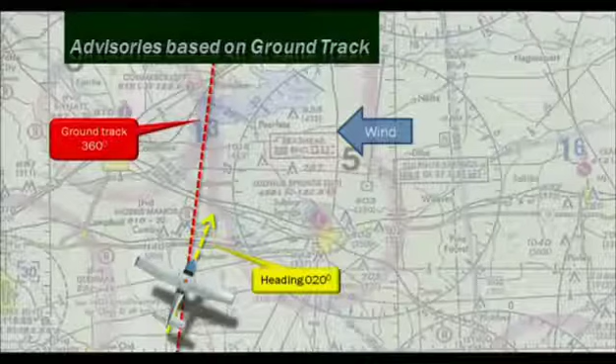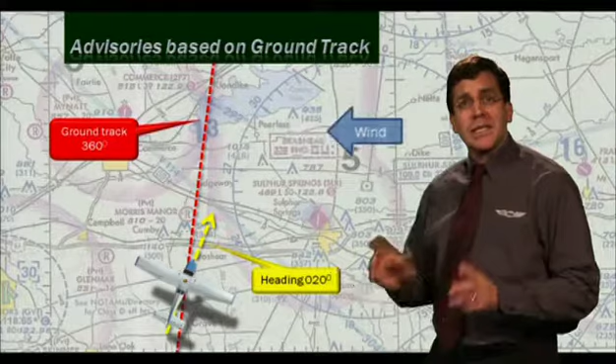Now, these advisories are based on your track over the ground and not on your actual heading. Let's take a closer look at how this works. Here is a 360-degree ground track, and the wind is coming from the right. We're flying a heading of 020 degrees, yet the aircraft is tracking over the ground, showing a 360-degree ground track. The traffic advisory ATC provides is based on the ground track, not on the heading you're flying.

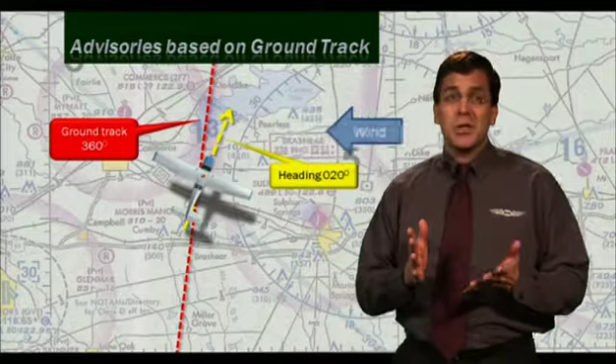This is important so you can look for the traffic in the correct quadrant. When ATC provides traffic information, they're giving it in terms of the face of a clock. As you sit in the cockpit, imagine a clock that's stretched around the outside of the cockpit. 12 o'clock is in front of you right here. 3 o'clock traffic is off your right wing. 6 o'clock traffic is behind you at your tail. And 9 o'clock traffic would be off your left wing.

If ATC were to report, Cessna 55 Foxtrot Papa, traffic 3 o'clock, 1 mile, opposite direction, and if you spotted the traffic, you would reply with something like, Roger, we have the traffic, Cessna 55 Foxtrot Papa. If ATC advises you of traffic and you don't have it in sight, respond, Roger, no contact, Cessna 55 Foxtrot Papa. Once you've made this call, it's important to continue to look for the traffic. ATC will likely give additional traffic advisories, either until that traffic is no longer a factor or until you spot the traffic.

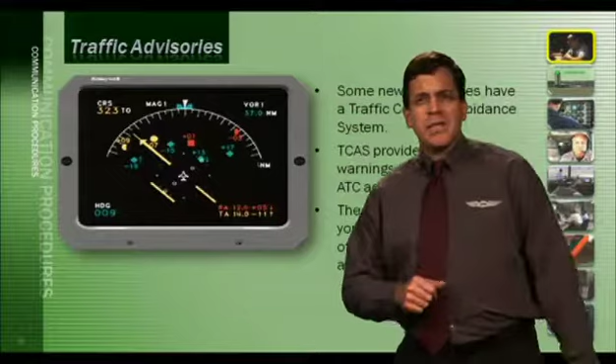Some newer airplanes have a traffic collision avoidance system, often called TCAS. TCAS provides traffic warnings in addition to the ATC advisories. The TCAS display will show your aircraft in relation to other transponders that it detects around you. Here we see a TCAS display, and each of these little lights represents either red for the potential threats or green for transponders that aren't threats at this time.

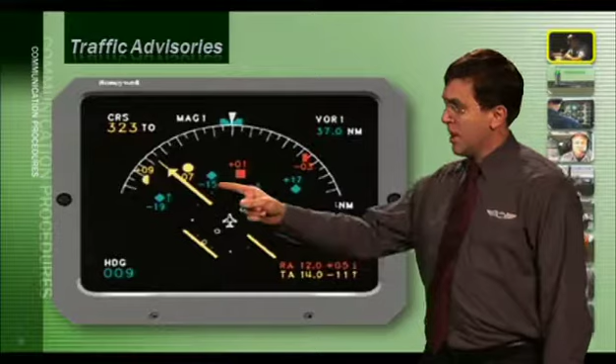Bob, what are your suggestions for how a pilot can become more familiar with the airspace they operate in? Well, today's pilots have an embarrassment of riches. If they have the right box in their panel, they can run the cursor up to the airport.

All the frequencies for that airport are displayed for them. But if you don't have that magic box, the number one recommendation is the Airport Facilities Directory. That little green book will give you everything you need to know.

Once you've drawn out your proposed route, look at every airport along the route, under the airspace and communications listings. The airspace listings will tell you what class of airspace it is, Class B, Class C, and what the frequencies are. If it's a part-time controlled airport, it'll tell you that and what the operating hours are, and whether it reverts to Class E or Class G when the controllers go home. That information is also available on the sectional, but the sectional refers you to the Airport Facilities Directory, so you might as well get that in the first place.

Let's take this time for an FAA test question.

An ATC radar facility issues the following advisory to a pilot flying on a heading of 090: traffic 3 o'clock, 2 miles, westbound. Where should the pilot look for this traffic? Only one answer, A, B, or C.

The answer is B, south. Traffic information is given in azimuth from the aircraft in terms of the 12-hour clock. If an aircraft is proceeding on a heading east, 90 degrees, traffic located at the 3 o'clock position would be 90 degrees right of the nose, south of the aircraft. Got it? Good. Let's move on.

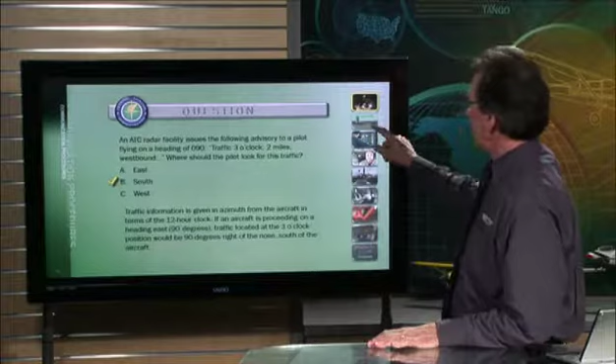Light gun signals, back in the classroom. It's easy to communicate with ATC if you have functioning radios. But what would you do if your radio equipment became inoperable during flight? How would you communicate with ATC at a controlled airport? We'll move on to talk about light gun signals and how they can help you in case of a communications failure. Light gun signals are used by ATC at tower-controlled airports to communicate with pilots who have had radio equipment failure, or those aircraft that don't have radios at all.

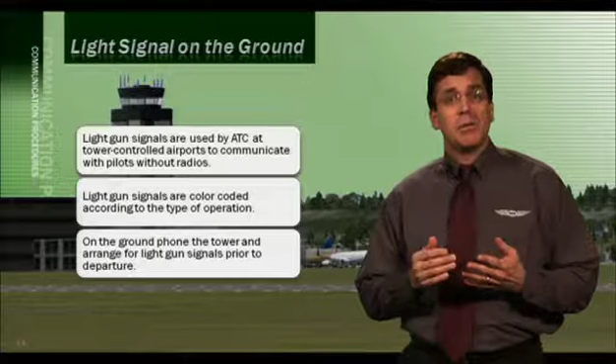The light gun signals are color-coded and provide you with different directions depending on ground or airborne operation. If you're on the ground and you experience a radio failure before departure, you'd call the tower by phone rather than expecting a light signal. They can easily give you a light signal, but sometimes it does distract from other more important activities. They would prefer you shut down and call them by phone to arrange departure with the light gun signal.

If you're on the ground and you see a flashing green light signal, it indicates you're cleared to taxi. A steady green light signal indicates you're cleared for takeoff. A flashing red light gun signal indicates you should taxi clear of the runway in use. A steady red, just like a traffic signal, indicates you should stop wherever you are. If you see a flashing white light gun signal, you should return to your starting point on the airport. An alternating red and green light means you should exercise extreme caution when operating on the surface of that airport.

The light gun signals you see on the ground have different meanings than those you see in the air. Let's take a look at the use of airborne light gun signals. First, if you're in the air and you have a communications failure, you should remain outside of the airport traffic area and observe the traffic flow. You can do this by flying above the traffic pattern or remaining safely outside of it until you've observed the flow. You should then enter the traffic pattern and look for light gun signals from the tower.

Because it's a tower-controlled field, they're going to expect radio contact to have been made with every aircraft. When they see you entering the traffic pattern without first talking to them, that's their signal to get the light gun out. The light gun signals in the air are similar to what you would see on the ground, but they have slightly different meanings. The flashing white does not apply in the air, so if you're in the air, ATC will not give you a flashing white signal.

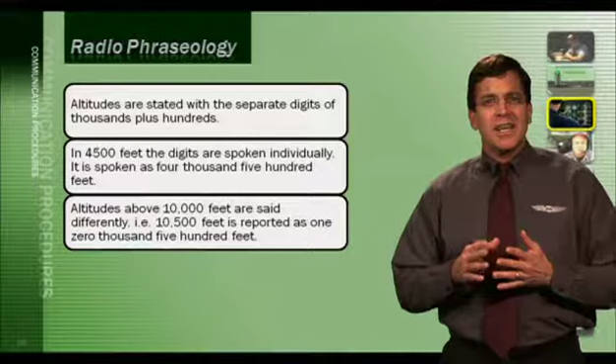Thank you. Altitudes above 10,000 feet are said in a slightly different way. This example of 10,500 feet would be reported as one-zero thousand five hundred. An altitude of 13,500 feet would be reported as one-three thousand five hundred.

Departure, Southwest 1303, 2,800 for 9,000. 1303, Portland departure, radar contact, climb and maintain 15,000. 15,000, Southwest 1303. Bonanza 9 Golf.

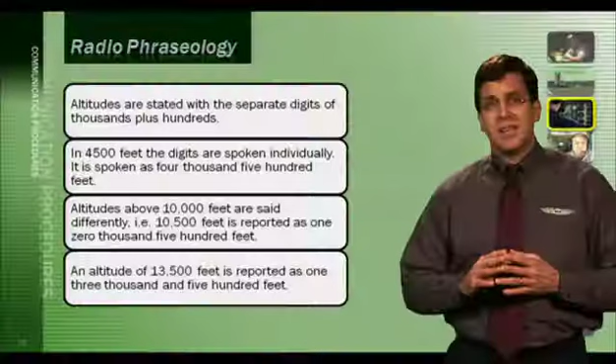While en route, you can obtain weather information from a couple of different sources. Now we'll briefly discuss how you would contact them over the radio. A flight service station, or FSS, is one source for en route weather advisories. Although they are called flight service stations, in your initial call to them you do not refer to them as flight service station or FSS. Instead, your initial contact call would be Seattle Radio, Bonanza 169er Golf Romeo.

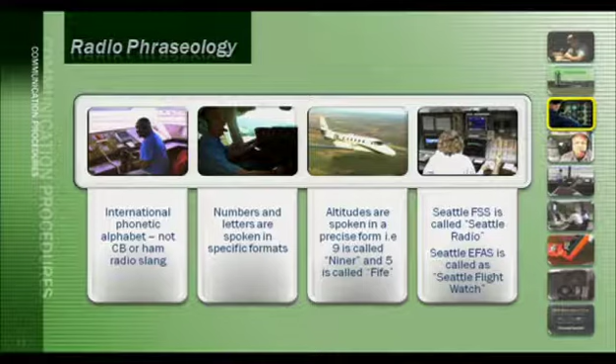Another source for weather advisories is EFAS, or En Route Flight Advisory Service, also commonly known as Flight Watch. It's very useful in flight because it provides weather advisories pertinent to the route and altitude being flown. Rather than contacting them as Seattle EFAS, they are referred to as Seattle Flight Watch. Your initial contact call would be Seattle Flight Watch, Bonanza 169er Golf Romeo, followed by the rest of your communication to them.

Seattle Flight Watch, Bonanza 169 Golf Romeo, Salem. We do have an AIRMET for some occasional IFR conditions south of your present position, and the Salem altimeter, standby.

The term initial radio contact, or initial call-up, means the first radio call you make to a given facility, or the first call to a different controller or FSS specialist within a facility. Use the following format: name of the facility being called, your full aircraft identification as filed in the flight plan, type of message to follow or your request if it is short, and the word 'over' if required.

When the aircraft manufacturer's name or model is stated, the prefix N is dropped. The first two characters of the call sign may be dropped only after ATC calls you by your last three digits. Now let's talk a little bit about aviation language: how important is it, rather, for pilots to use the correct phraseology?

Is it better to say nothing or say it well? Well, you never say nothing. I'll answer your question with a question, however.

What is correct phraseology? Air traffic control handbooks require specific phraseology, and controllers are tested on it. Pilots don't have a similar requirement. There's no regulation that requires pilots to say certain things in a certain way. With experience, it comes. But referring to things like Chapter 4, Section 2 of the AIM for suggested phraseology, and the pilot controller glossary for definitions of terms, are useful things pilots can do. But the AIM only scratches the surface of what you need to know.

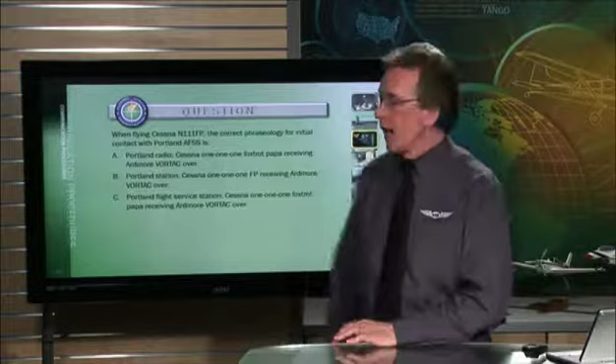Let's take a question on radio phraseology. When flying a Cessna with this call sign, the correct phraseology for initial contact with Portland AFSS is... I'll give you some time to look over each of these possible answers. Only one is correct.

Think you have it? Okay, let's see. When flying Cessna, November 111 Foxtrot Papa, the correct phraseology is A: Portland Radio, Cessna 111 Foxtrot Papa, receiving Ardmore Vortac, over.

By way of further explanation: state the name of the facility being called, your full aircraft ID as filed in the flight plan, the type of message to follow, and the word 'over' if required. When the aircraft manufacturer's name or model is stated, the prefix N is dropped. The first two characters of the call sign may be dropped only after ATC calls you by your last three letters or numbers. A little complicated there, but I think you figured that one out.

All right, let's move to a new topic. This one, the Automated Terminal Information Service, or ATIS.

Now, Bob, what should a pilot do if they make a mistake, whether it's using the wrong frequency or saying the wrong thing? How many times have I heard an airline pilot say, Seattle Center, Big Bird 23 X-ray is climbing out of 15,000 for flight level 330, and the voice comes back, 'you're still on tower frequency.' Or a corporate jet saying, 'tower, Buzzbomb 234 is ready for takeoff,' and they're still on ground control frequency. Everybody does it. If you say something you interpret to be wrong, say 'correction,' and then say the right thing. That word is in the glossary, by the way.

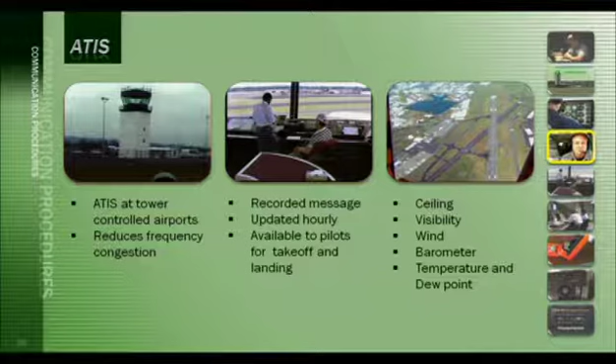ATIS also provides the wind direction, which helps you align for landing, the barometer setting, which you want to have properly set before landing, and it will also advise of the runway in use. The ceilings and visibility may not be reported if the ceilings are above 5,000 feet and the visibility is greater than 5 statute miles. Listen to this pilot after receiving ATIS.

Next up, controller communications. First we'll cover communication with controllers at an airport while your aircraft is still on the ground. Prior to taxiing, your initial contact will be with the ground controller. A ground controller is one who works the entire surface of the airport and controls aircraft that are on the ground. We'll discuss some specific clearances you might receive.

If you get a clearance to taxi to runway 30, that's a clearance to taxi on the taxiway and across all intersecting runways. But it's not a clearance to taxi onto the active runway. Listen to this interchange.

Salem ground, the Bonanza 169 Golf Romeo, with information Charlie, ready to taxi.

Bonanza 169 Golf Romeo, Salem ground, taxi to runway 34. Roger, 34, Bonanza 9 Golf Romeo, say your direction of flight. We'll be heading to the north. Bonanza 9 Golf Romeo, roger.

A clearance to taxi into position and hold is a clearance to taxi onto the active runway and prepare for takeoff, but it is not a clearance to actually take off. To take off, you need an explicit takeoff clearance.

Listen to this. Salem Tower, Bonanza 169 Golf Romeo, ready for departure, straight out, runway 34. Cessna 574, turn left at Alpha and contact ground point 9er. Roger, 574, turn left Alpha, 1.9er. November 169er Golf Romeo, Salem Tower, straight out departure approved, runway 34, cleared for takeoff. Roger, cleared for takeoff, runway 34, 9 Golf Romeo.

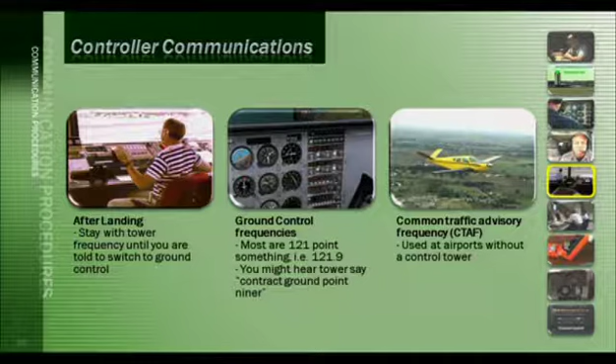At airports without a control tower, you need to know which common traffic advisory frequency is used, called CTAF for radio calls. You can find CTAF frequencies on sectional charts and in the airport facilities directory. If there's no flight service station at the airport, a Unicom frequency is used, commonly 122.8 or 123.0. When there is no flight service station or Unicom at an uncontrolled airport, a multicom frequency is used for communications. The multicom frequency is 122.9er. You would use the Unicom or multicom frequencies to self-announce your intentions at a non-towered airport.

Aurora traffic, Skipper 3801 Romeo is about a mile and a half northwest over the river on a 45 for left downwind 35. We see the departing traffic. Aurora traffic, Cirrus Charlie Delta is turning northwest crosswind, looking for the 45 traffic. Aurora State traffic, Bonanza 169 Golf Romeo, turning left base, runway 35, over.

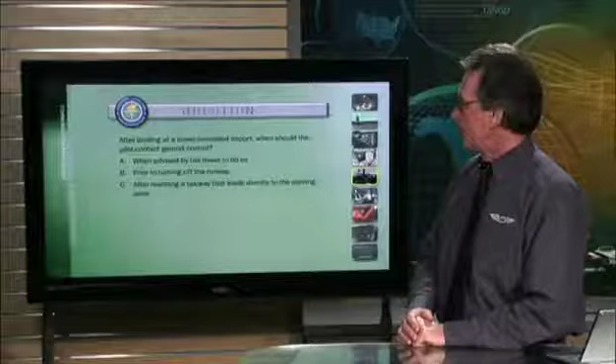Okay, got it? Good. After landing at a tower-controlled airport, when should the pilot contact ground control? When advised to do so by the tower. That correct answer is A. A pilot who has just landed should not change from tower to ground frequency until advised to do so by the tower. Okay, let's move on to a new topic.

This one, flight service stations. We've talked about flight service stations a few times already, so we'll go into a little more detail about the services they provide and the frequencies you use to make contact with them.

Flight service stations are established at airports to provide information. At airports without a control tower but with an FSS, an airport advisory area is established within 10 statute miles of that airport. A flight service station may be abbreviated as FSS. On sectional charts, you can look for the blue box which identifies a flight service station. For example, let's say we're trying to call Elizabeth City Flight Service on 122.2 or on 122.05. Prior to entering the airport advisory area, you should contact the local flight service station for airport advisories. The flight service station cannot give you clearance information, such as clear to land or clear to take off, but they can let you know about traffic in the area or give you other airport information.

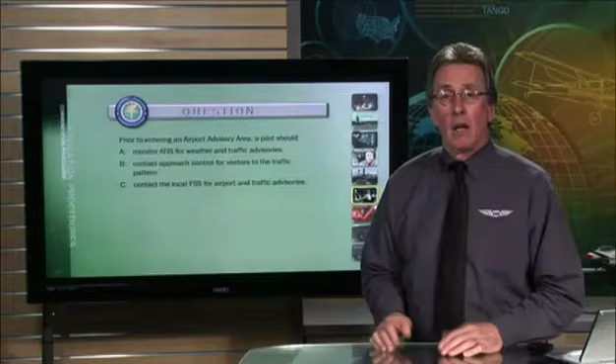All right, let's work on another FAA test question. Prior to entering an airport advisory area, a pilot should, which of these? Study them closely.

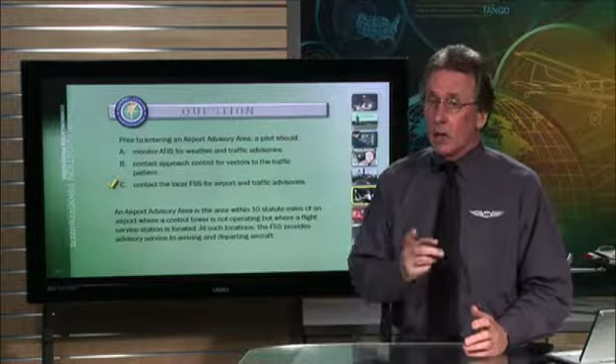We'll discuss emergency locator transmitters and services available to lost aircraft. The emergency locator transmitter, or ELT, is a battery-operated transmitter that emits a tone on the international frequencies of 121.5 and 243.0 megahertz.

Here's what that tone sounds like. Listen.

The ELT is typically located in the aircraft in such a position that it will hopefully survive a crash. It's designed to be activated by the G-forces present during an airplane crash. Those G-forces activate a switch inside the ELT which turns it on and starts broadcasting the signal. This signal will be received by ATC and will alert them that there's been an accident. The ELT will help search and rescue efforts to locate a downed aircraft.

A hard landing can also activate an ELT. If you experience a hard landing, monitor 121.5 megahertz before engine shutdown to make sure you haven't accidentally turned on your ELT. You should contact ATC if you find that you have inadvertently activated your ELT, so they will not assume an aircraft has crashed.

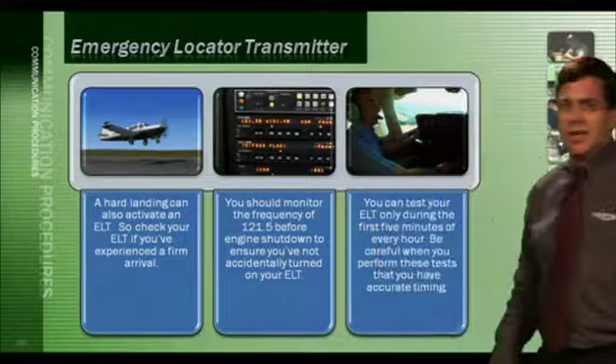You should periodically test your ELT to make sure that in the event of an actual emergency, it's going to function. You may test your ELT only during the first 5 minutes of every hour. Be careful when you perform these tests that you have accurate timing. If you test at times other than within the first 5 minutes of the hour, you're going to cause undue alarm at the FSS.

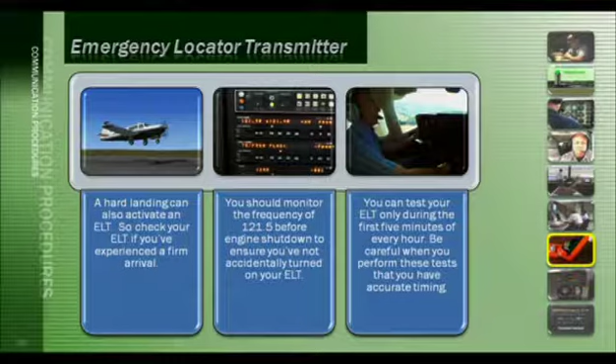Now next up is the DF steer. If during a flight you find that you have become lost, there's help. ATC and FSS can use VHF direction finding gear to assist you to determine your direction from the station. This is known as a DF steer. These facilities have ground equipment that display the direction each time the airplane transmits a signal.

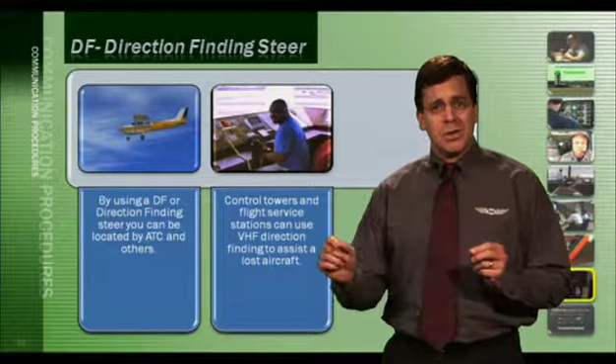Your aircraft must have a VHF transceiver or communications radio to take advantage of this service. If it does have that receiver and you think you're lost, you can tell ATC you would like to request a DF steer. By transmitting several times over the radio, the controller can advise you of the relative bearing to the airport or provide you with a series of headings to the airport.

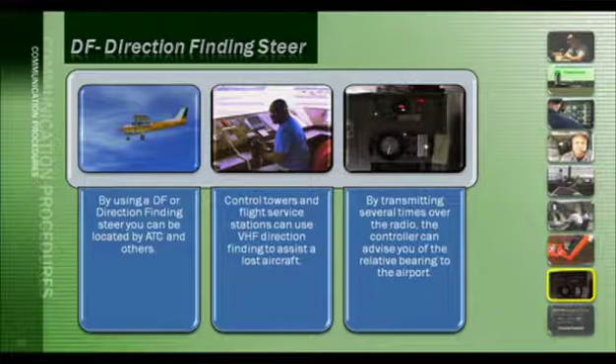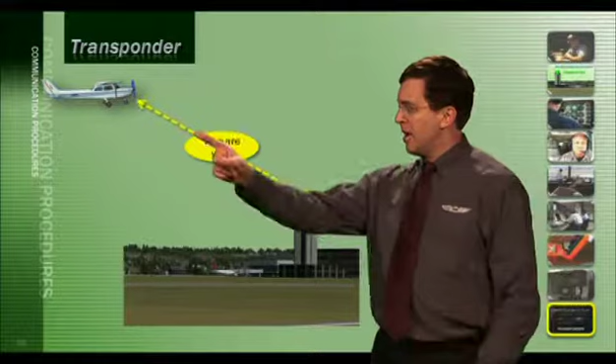Next up, the transponder. Transponder tracking is a service provided by ATC. ATC radar relies on a signal transmitted from the radar antenna site and from a reply signal transmitted from your aircraft transponder. Now, Bob, what services do you recommend that VFR pilots take advantage of while flying en route?

There's no doubt about that. Radar flight following. Everybody, in my mind, should use radar flight following. It's nothing so reassuring as talking to someone who knows where you are at all times in case you might need a little help.

Following up on an earlier answer, you find this in the airport facilities directory. A little R in a circle means that they have radar, and you'll find the frequencies of air traffic control centers and terminal radar facilities. And these people lead you by the hand every place you want to go, and it's really comforting.

If you're departing a tower-controlled airport, learn the appropriate frequency for the overlying radar facility and ask the tower for a handoff.

Departing an uncontrolled airport, you might find that the overlying airspace is controlled by a center, and you'll have to get some altitude before they can pick you up. But just call them up and say, request flight following, tell them your destination. From that point on, they lead you through Class C airspace, they lead you through Class D airspace. You don't have to do anything.

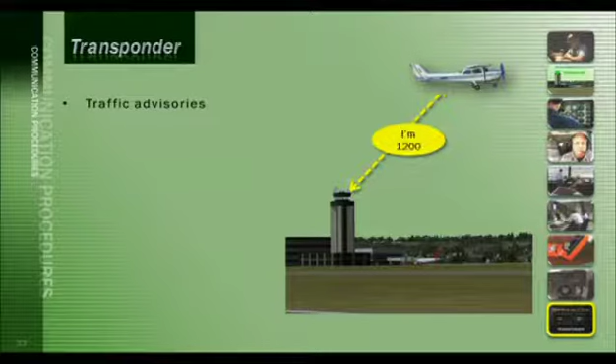These radar services are used continuously for the control of aircraft flying under Instrument Flight Rules, or IFR. Most ATC facilities will also provide traffic advisories and limited vectoring to VFR aircraft. To receive these services, you must have a transponder. Transponder operations at an ATC facility can provide you with a couple of different levels of service. The basic radar service provides airport traffic advisories and some limited vectoring to VFR aircraft.

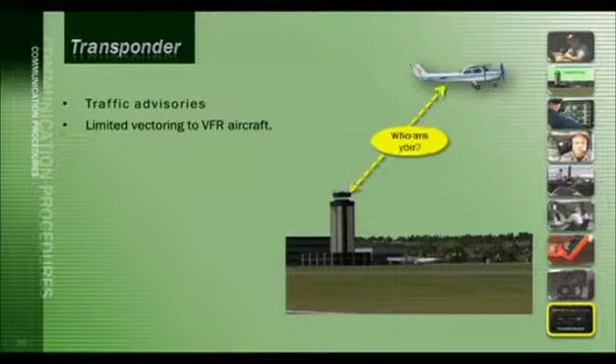Stage 2 radar services adjust the flow of arriving VFR and IFR aircraft into the traffic pattern, which makes it very nice for getting into a crowded airport. Stage 3 radar services provide sequencing and separation for participating VFR aircraft.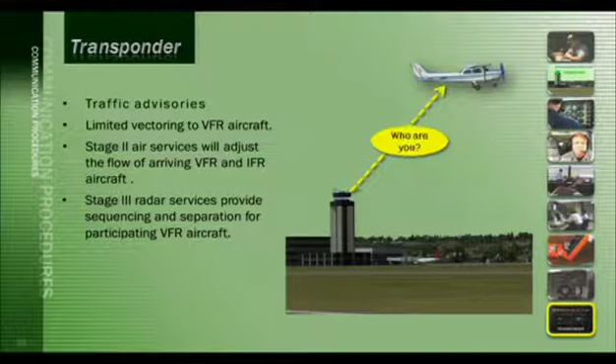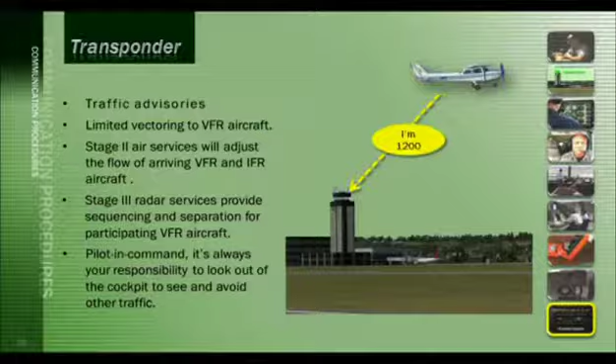But remember that as a pilot in command, it's always your responsibility to look out of the cockpit to see and avoid other traffic. The transponder in your aircraft looks something like this one here. The transponder is set to 1200, which is the VFR squawk code you use when flying VFR.

If you're flying with flight following, ATC will give you a specific code to squawk. Otherwise, you should always use 1200.

Portland Approach, Bonanza 169 Golf Romeo. Bonanza 169 Golf Romeo, go ahead. Roger, our current position is about 12 miles north of Salem. We'd like to overfly your Class C airspace, northbound towards Scappoose.

Departure, Southwest 1303, 2,800 for 9,000. 1303, Portland departure, radar contact, climb and maintain 15,000. 15,000, Southwest 1303. Bonanza 169 Golf Romeo, squawk 0162. That's 0162 on the squawk, roger.

There are some codes you should avoid putting into the transponder unless you have a particular situation. The code 7500 tells ATC that you are being hijacked. You don't want to broadcast that code unless indeed you are being hijacked.

The next code is 7600. 7600 tells ATC that you've lost your communication radios. Perhaps your GPS or your transponder is still working, so you'd want to tell ATC that you've lost your ability to communicate with them. The next code to avoid unless you have an emergency in flight is 7700.

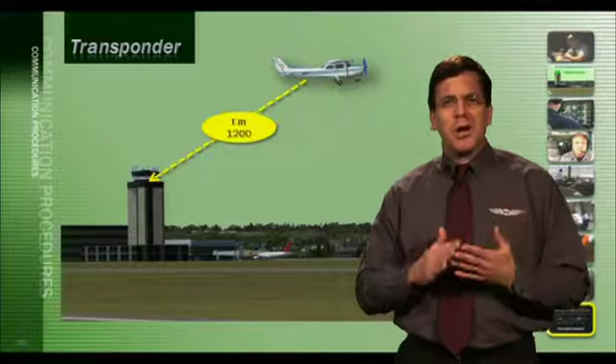Transponder operation is important, even if you're not talking to ATC. You should operate your aircraft squawking the VFR code 1200 because it does a couple of important things. First, ATC has radar that allows them to see other aircraft regardless of whether we're talking to them or not. If they see a transponder code, that indicates they've got a target out there, providing additional information for ATC.

Now, we all know it's possible for a VFR pilot to stay away from tower-controlled operations for their entire career. Do you think this is a good idea, or do you think all pilots should experience Class B, Class C airspace? I think it's a mistake. In the first place, in order to qualify for your private pilot certificate, you have to make 3 full-stop landings at a tower-controlled airport. But no one should consider themselves a competent pilot unless they can fly into Class C or Class D airspace.

Class B airspace might be too far away to fly to during a training flight, but definitely Class D and Class C should be part of every pilot's repertoire.